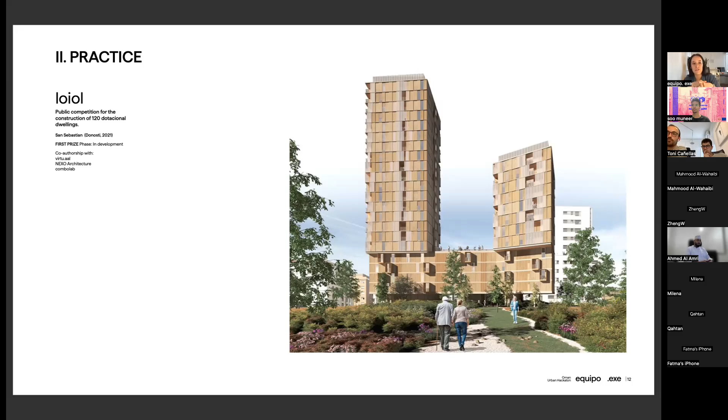This competition is for the construction of a residential tower in the north of Spain. It's 120 units of build-to-rent housing, and it's starting right now, so it's a very exciting project and we are fully involved with it. This is the competition panel, showing how we won.

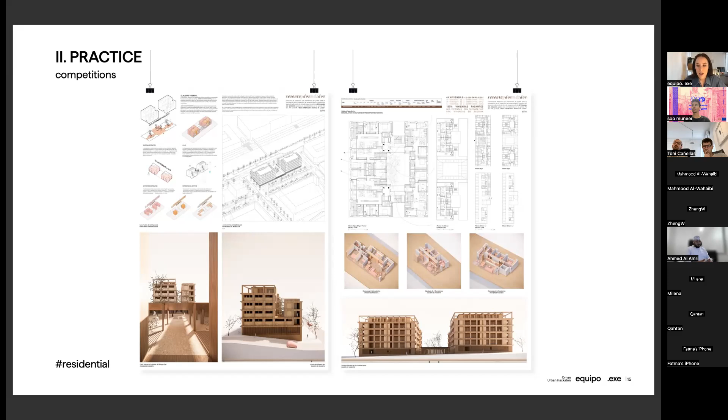We are also very active in competitions. We think this is a huge opportunity for us to rethink architecture, about global problems that affect architecture, and also to think about different typologies and how we can introduce knowledge from other areas into architecture. So we've made competitions for residential programs, sanitary programs, and some institutional competitions too.

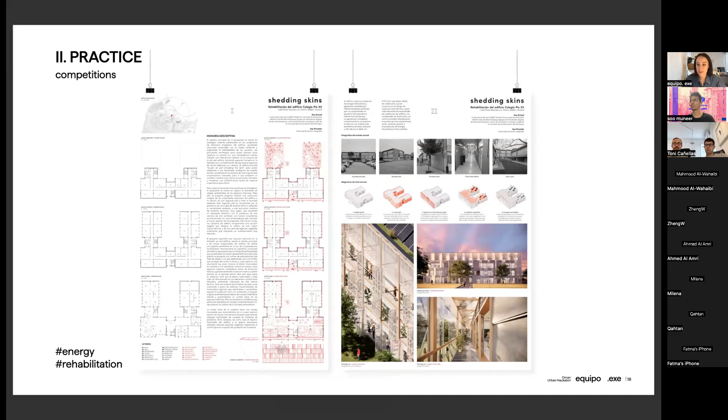And cultural buildings, but we also like to face certain aspects such as energy rehabilitation of existing buildings, and also heritage and conservation. We think it's important in these times to think about identity and integrate it within this wider context that we have with global problems.

The third pillar, which for us is one of the most special because we're aware it's not the most usual for other architectural firms, is that we do collaborations with other studios, not only architecture but also engineering studios. This has allowed us to participate in big scale projects that are otherwise very hard to reach for young firms such as ours. This has opened us new horizons in architecture.

This has introduced us to different cultures. We've learned a lot. We've been able to give fresh inputs to these larger companies, and we think this is as important as the other two. So we don't understand these three pillars in our firm as independent areas, but we think they relate to each other, and what we learn from one area we can reproduce in the other.

And also the questions that emerge in the projects we have, we use the tool of academia and research to try to find answers, or to find what other people thought were the right answers about it.

So now jumping into the specifics of the project that you might find most useful, which is the LifePact Madrid project. This is a very complex project because it's international, but it's also very local. I'm trying to do my best for you to understand the full ecosystem. If you guys have any questions, feel free to type them, or we can talk about it at the end of the presentation.

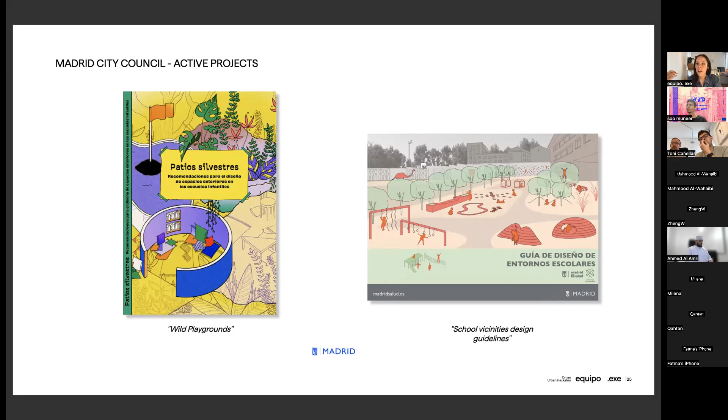So what the City Council of Madrid identified is that they already had 2 different programs that were complementary and shared some goals with the LifePack program: one about wild playgrounds, which tries to reintroduce nature within the playgrounds of the schools, and also school vicinity design guidelines. So this rewilding of the schools is not only happening inwards, but it's also happening outwards in the urban design and the urban environment of the schools.

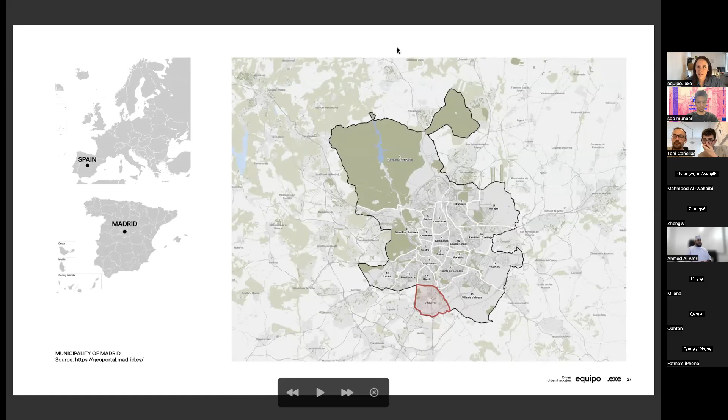Very, very strong heat waves that are already taking longer and being a lot warmer than they used to be before. We're already suffering droughts, and whenever it rains, it rains a lot at the same time, so we are already facing problems of floods. And of course, this leads to the use of active climate systems like air conditioners, which creates another new problem within the urban area: lower air quality because we use more private transportation since you cannot walk, and noise pollution. These are problems many people in many other areas of the world are facing, but these are the ones we are focusing on within this project.

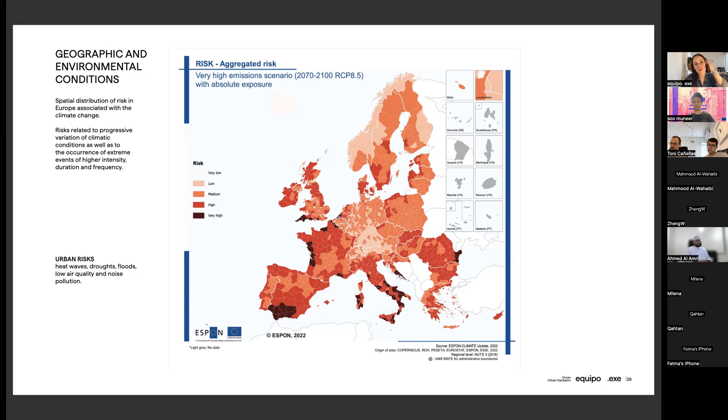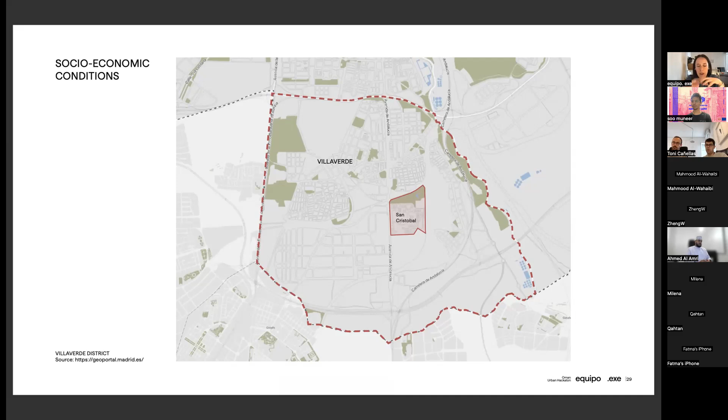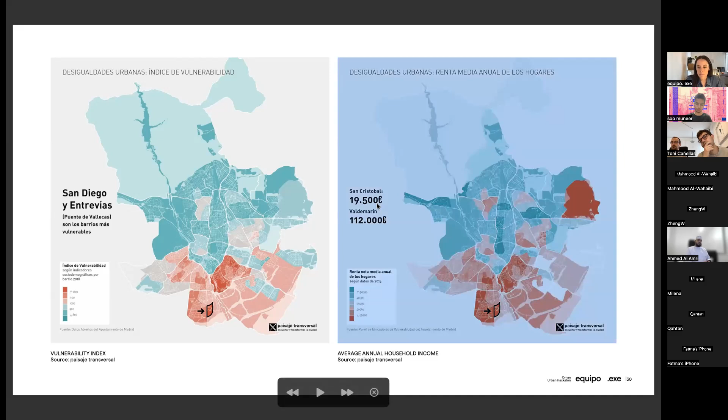What has happened historically in this neighborhood is that it's been overdiagnosed. There have been many projects taking place in this area, but they mostly focus on the early stages, so there's a lot of research and a lot of reports that have been provided, but there has not been many actions taken here.

So one of the first priorities of the Polytechnic University of Madrid, one of the first things they asked us to do, was to look at all of the reports that have taken place on this neighborhood and try to create this map, summarizing what information we already have. We don't have to go there and start from zero. We do have a lot.

But one of the most special things about the LIFE-PACT project is that it's not going to be completed until it's fully implemented. So hopefully, and I think it's going to go well, this is not going to be just another project in a folder on a desk.

So these are the parts that we have participated in as a firm, as equipo.exe. Specifically, we were in charge of the concept design of the project. We had to go through the co-design phase and the participatory process prior to introducing the feedback we got, and then redo the concept design according to this feedback. We're currently in the phase of construction documents.

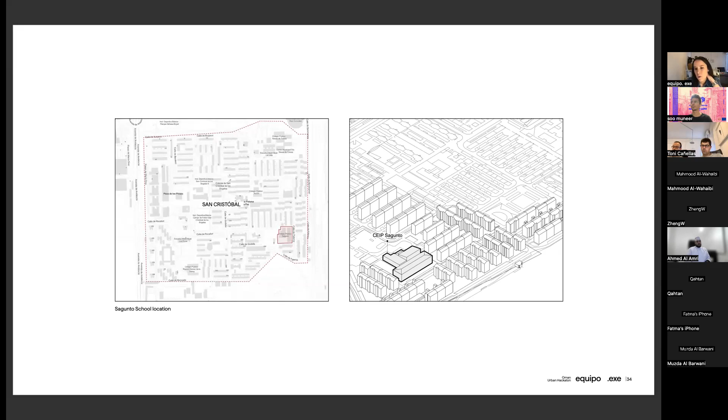Just to give you an overview of the area, this is the current state, pictures of the vicinity of the school, and this is the social housing that is there. These are linear blocks, and most if not all of them have cross ventilation, which is good. It was the way they ventilated housing back in the 50s. But as you can see, it's not a consolidated urban tissue.

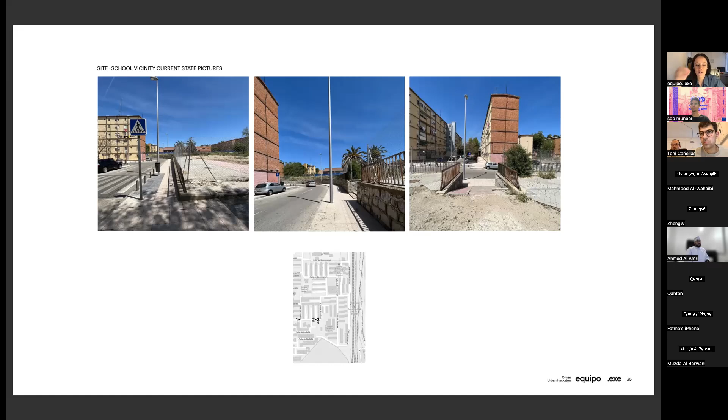There are many urban voids, many places waiting to be built. And this is the school you can see right here with the brick and the blue fence. This is the area and the surrounding area of the school.

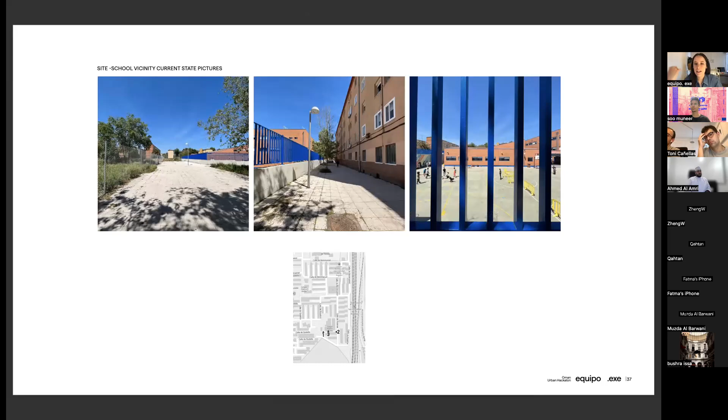This is the entrance. We can see we have a very opaque fence here. This is the main entrance, but you could never tell this is the main entrance. It's very small, and it leads you to a very narrow sidewalk. You can see there are cars parked right in front of it, and the width of the road is very wide. We also have some containers in front of it, which doesn't give a very good impression for the kids.

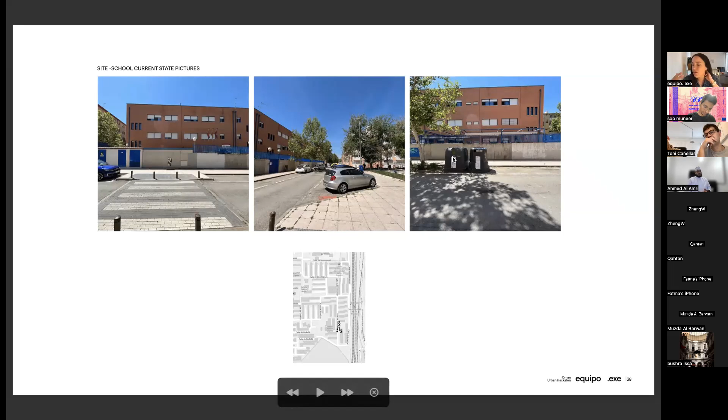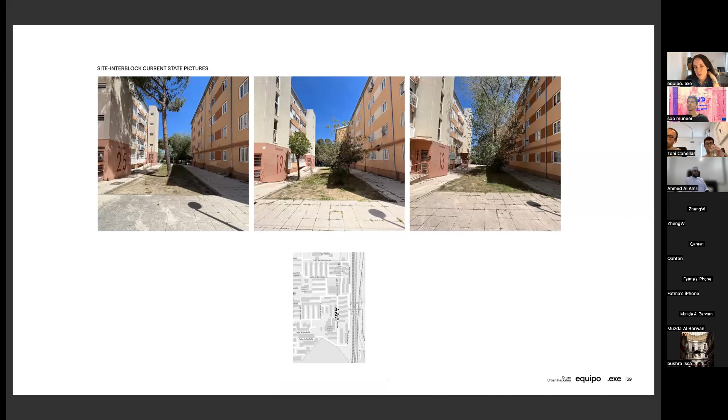This is an area specific to this project. Here we can see how another project, different from the City Council one, merges here as part of the synergy we mentioned, which is the interblock areas between these linear blocks. This used to be a green space full of nature that has been degrading over the years. Whenever they have a problem with a tree, they usually just cut it down without replacing it, so now some areas are not as green as they used to be.

So the whole neighborhood has been suffering a process of degradation from the 50s, when it was built, to today. These are the elements we had to work with: the common elements of the school vicinities project of the Madrid City Council, which were the school plaza, educational street, tree-lined gates, and service band. And we had the specific elements of the Sagunto school, which were the interblock areas.

Here's the school plaza, so we get a hint of the goals of each of these elements. The objective of the school plaza is to create a space next to the main entrance of the school. This is happening all over the city of Madrid, to promote an inclusive space for different segments of the population. This is something they really focus on.

They don't want it to create spaces only for kids. The idea is to integrate people of different ages to create a very rich social environment. In the school plaza specifically, this is done by removing very directed playgrounds and instead providing surfaces that allow free, empowering play, giving room for the imagination of the kids without creating a purely kid-led urban space.

We also have the educational streets, whose objective is to improve the conditions of the school environments, transforming them into healthy spaces and improving safety and accessibility. This usually happens by introducing green areas, removing parking area, and narrowing the width of the streets.

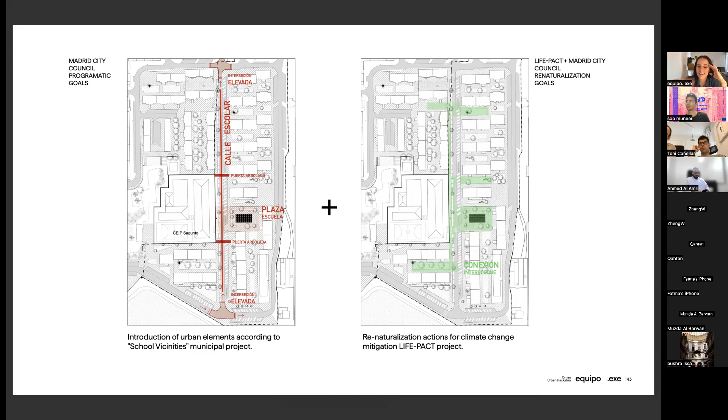So now it's very important to speak with real facts in the table with the city council and all of the other agents involved, to see what we can really do, and not only let it go in our imagination and without any real constraints.

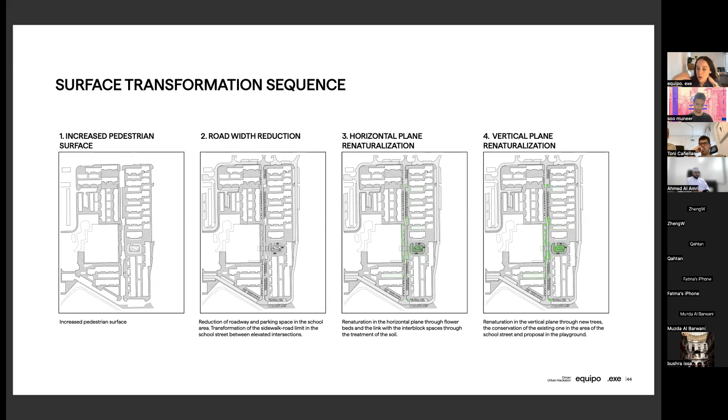So the sequence that we followed was first we increased the pedestrian surface. Then, as we mentioned, we made a reduction of the road. The third step was the introduction of nature in the horizontal plane. And the last one was the introduction of vegetation in the vertical plane, which is very important because this helps reduce the impact of solar radiation, not only within the surfaces of the public space, but also in the facades of the buildings.

So this is the area at the end of the concept design, the area that we were intervening in. This is a very fast collage that we did to provide an idea of how it would look to introduce these vertical planes with vegetation here, removing this very opaque fence. So we can give privacy to the school through the vegetation while we keep security of the public space, because from the interior of the school you could keep control of what is happening outside with the little kids. So it's a soft control strategy.

The next step that took place, which was one of the most interesting for us because we were able to receive feedback from very different agents, was the co-design and participatory process review.

So what happened was that these initial phases were taking place in parallel. Simultaneously, data collection and diagnosis of the neighborhoods was happening, a participatory process for co-design of the urban plaza, and the Sagunto school concept design that we were in charge of. So what we got at the end of this was an input collection, whose goal was to reinform the project in the transition from the concept to the execution of the project.

We have three main categories of inputs here. One of them was the inputs from the neighborhood community. Another one was from the school community, and the last one was the environmental indicators that were provided to us by Polytechnic University of Madrid, by ABIO in particular.

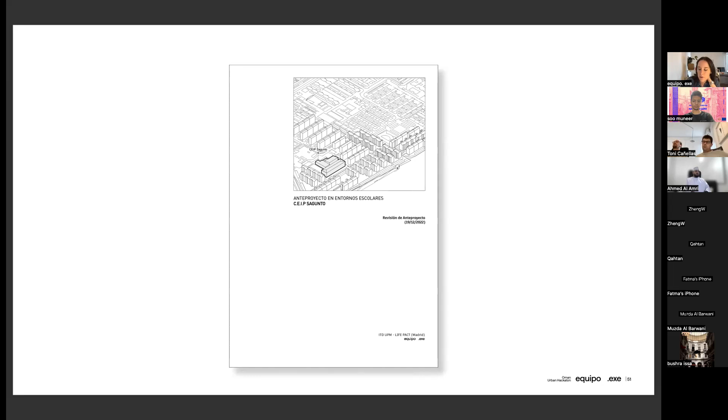And this is what we created: another report with a revision of the concept design, where we put the category of the inputs, the agents, the comments, how we could implement these comments within the urban design, and which elements of the school vicinities programs we could use to absorb these comments.

Another thing that happened at this stage was that we redefined the area of intervention, because what we had at the beginning was a very linear project with these little appendices happening with the interblock and the urban plaza. We realized that concentrating the efforts in the urban plaza and the immediate area around it would create a stronger intervention, with a gravity point in the school plaza and different gravitational points in the interblock areas.

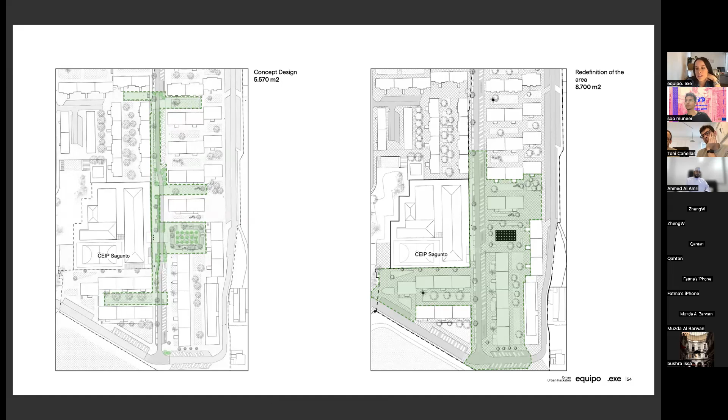So in general terms, the redefinition of the scope of the project had positive effects on the general objectives of the project. Also, the transformation of the project from a very linear character based on street design into one with a strong centrality eliminates the risk of specific actions of a merely testimonial nature, which is something we were very worried about. The Plaza Escuela project would be erected as a new center of the neighborhood, around which the rest of the interventions will orbit.

There's something very cool that happened also at this stage. This is a live project, constantly changing, constantly receiving feedback from different agents. We got this information from the Spanish Society of Ornithology, which we thought was very interesting, and we are thinking about how we can introduce it within the project. We have three species here - Vencejos, Aviones, and Golondrinas - which are specific to this area and used to live in these interblock areas when it was more of a natural interblock area. What has happened now is that they're cutting down the trees and not introducing new ones, removing not only vegetation but also the biodiversity of this area.

The temperature of these interblock areas is increasing because now they are not shaded, and the interior of the houses is increasing too because they don't receive shade from these trees. What happened before this went wrong was that the trees in the interblock area created more comfortable outdoor temperatures, so neighbors could open windows to cool their houses. Birds were in charge of eating mosquitoes and flies. It was an ecosystem that worked. The moment you remove the trees, the birds stop coming. Then you start having problems with insects, and people cannot open their windows because it's warm outside and because you have insects you don't want within your house.

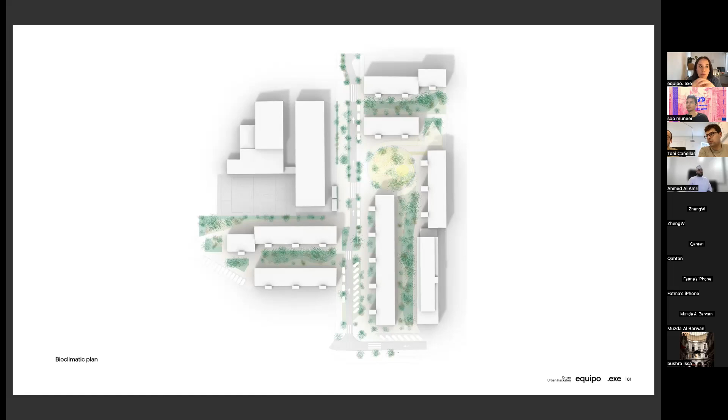This is a schematic bioclimatic plan. We try to see where we should reinforce the introduction of trees. We try to understand how the shadow thrown by the buildings itself could help us trigger certain areas of the public space.

This is an axonometric view of the school plaza. You can see how we try to avoid the specific fixed playground here. We do introduce certain things such as this light right here or some climbing areas, but it's mostly to encourage free play and imaginative play for the kids.

This also invites other segments of the population to this area, because now what you have is a higher comfort urban area that is being used. And when urban spaces are used, they're safer, because you have this informal security where people watch and take care of each other.

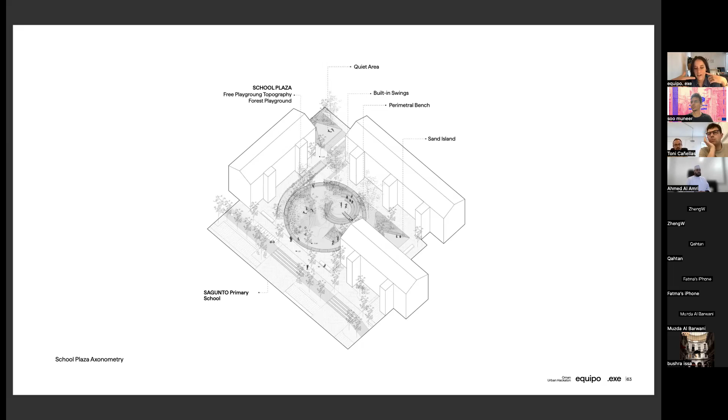This is a vegetation characterization that we've done of the area. We have this premise of a tree for a tree hole, so we want to reintroduce trees where they were designed at the beginning. We made a study on the tree species, the age, and the trunk perimeter that we have in our area.

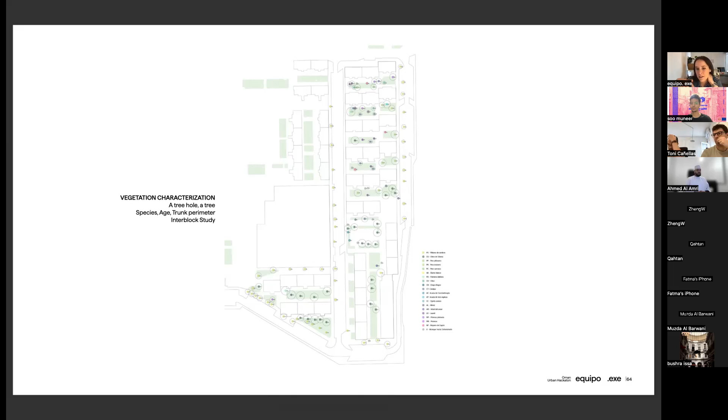We also have the 3 dimensions of public space, which is more related to program specifically, and it's important to foster comfort and identity in this space. This identity, we think it's a priority, because we tend to have places that look like any other place within the city, and neighbors like to think they belong to their neighborhood. So it doesn't have to be something very exaggerated, but it's something we have to take into account in the project, and we certainly try to always introduce it. And of course, use activity, as we were mentioning, as the basis for a safe space.

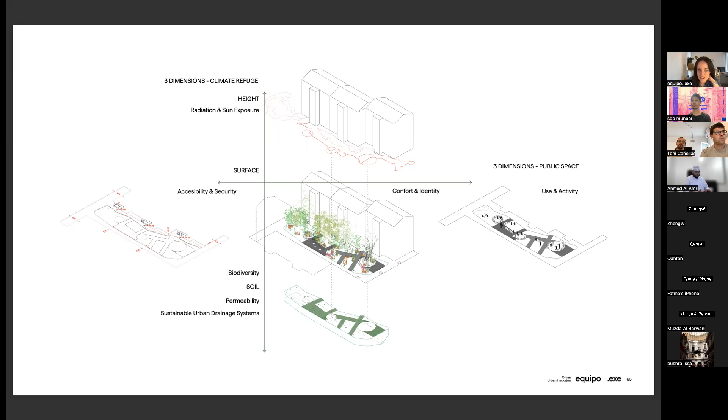This would be an axonometric of the interblock area. And this is a collage that we created to provide an idea of all the aspects we have in mind. By working with these more abstract images, it's just like when you do a hand drawing—you don't have the constraints of specifics, but it gives you the opportunity to create a strong image that can serve as a focus point. So we know it's not going to look exactly like that, but we will try to make it look as much like that as we can.

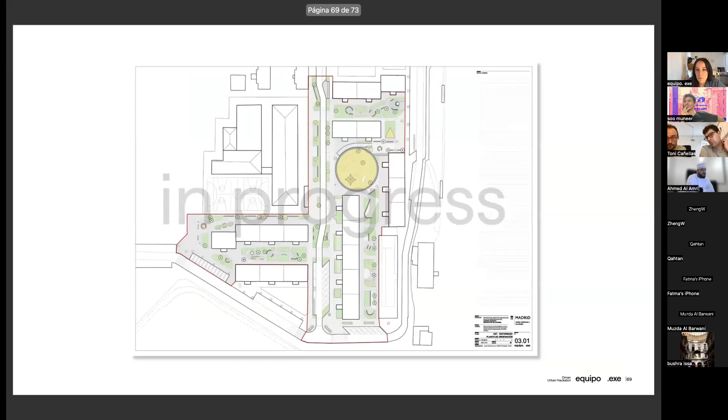The phase we are doing right now—the 3 prior phases are already completed, and we are in the construction documents. I would love if we could have shared the documents with you, but they are in process, so we don't have much to show. What we can show you right now is just a plot of how it is right now, the 3D we're working on, and the specifics of the Urban Plaza.

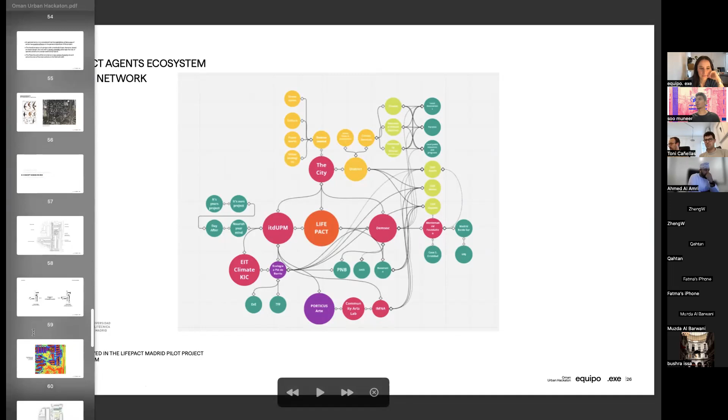Actually, I have a question. Silvia, you mentioned a lot about heat radiation, and as you guys know, here in the Middle East, heat waves are a big issue, and one of the ways we can regulate and balance out heat radiation is by vegetation. Could you speak more about how we can utilize the idea of vegetation with radiation maps, and how we implement those in a certain space?

Yes, sure. This is actually one that could be called a nature-based solution. What we did here, because it helped us a lot, was to divide the horizontal surface and how to intervene in them, and the vertical surface and how to protect them, because the strategies you need to follow are a little bit different. Of course, you have the tree, which we all know is a single element that provides shade, but there are also other strategies.

For example, here in Spain, in Madrid, we have the problem of heat islands, which is something that happens within urban environments when you have pavements that are dark. They absorb a lot of heat.

Usually materials radiate heat at nighttime, which is when temperatures should be lower and the heat should be removed by the breeze. The fact that we have these materials with high thermal inertia means they get the warmth, store it, and release it at night. What happens is that we don't have the nights anymore to refresh the environment.

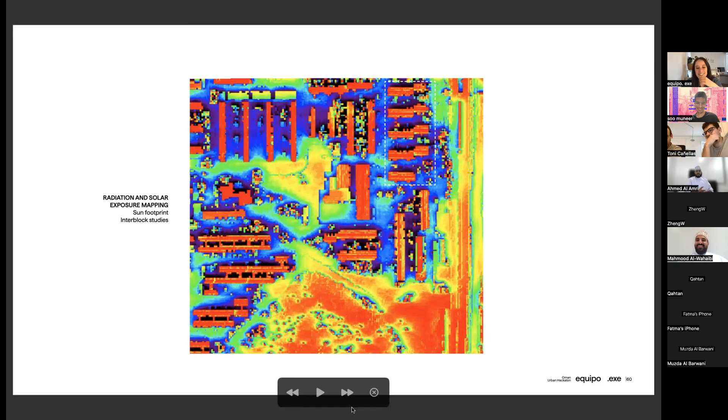Dr. Bindu or whoever that is from that team. Hi, good evening, this is Bindu. Can you hear me? Yep, and we also have Ahmed Al Amri, he is also from that team. Yes, Dr. Bindu, here I have one question.

That is, you were talking about permeability in the pavement or in the road? In the pavement. So this can be done, are you using material or creating permeability in the concrete? Because when we are going for lightweight permeable concrete, won't it be more useful?

Well, there are certain materials that allow concrete to be permeable. They're very interesting. We're actually now in the construction documents phase, so we do have to go to the specifics of materials. For us, it's also a good opportunity to learn from you guys what you're researching.

And we do know there are certain pavements that allow the water to drain on it. I'm not sure if this is what you were mentioning, Bindu. Yeah, this is what I'm mentioning, because during rain times we can see some water stagnating and it's very difficult to permeate inside. So it will be good if you are creating a permeable pavement. For a road it won't be that suitable, but for pavement, so that this water will percolate inside, and that can also be used for creating this cool atmosphere. This water that is collected underneath can be drained through underneath that way.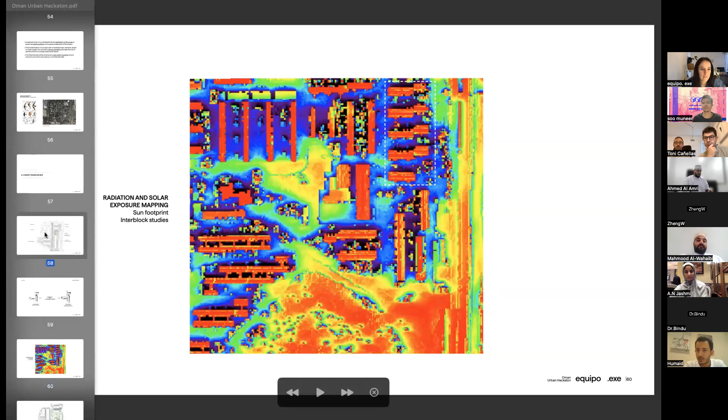Thank you, Mahmood, for this great opportunity and presentation. Regarding the mobility, as I saw, you increased the pedestrian walkways and areas almost double. So I have a question regarding accessibility, as we know it's an important thing in urban planning. While you are increasing the pedestrian areas, how did you take accessibility into consideration regarding parking for private cars and for public transportation? I saw one map you showed about accessibility, if we can go again to that map and explain more about the accessibility point. Does it change before and after the pedestrian walkways changed? I'm not sure if the question is clear or not.

Hey, I think it's clear. Is that what happened with these cars your question? Yeah.

Well, this is a tricky topic. When we met with the city council, they told us they're usually very careful before removing parking spots, especially in this neighborhood where people don't have private parking and all park on the street. They are committed to reducing parking space in the main facade of the school, but asked us to try to respect the number of parking spaces in other areas of the neighborhood, which, if we look at the floor plan, isn't that many areas.

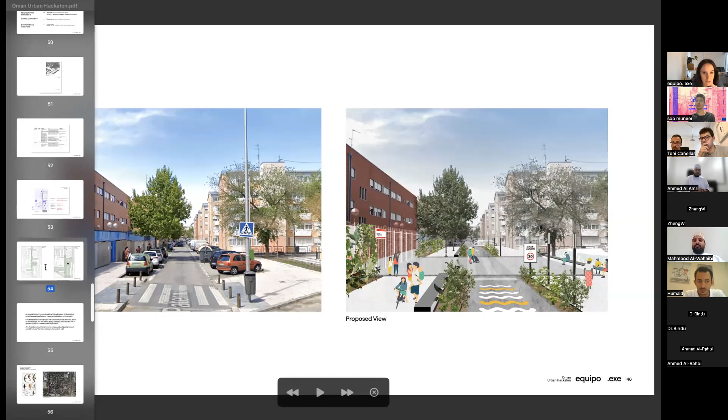As you can see, this is clearer. One thing we do is that even though the actual width of the street hasn't changed in this part, we can work with materials and the introduction of nature to reduce the perception of the width of the street. So even though we still have about 6 meters, the perception as a pedestrian is that the street is only the width of the road, because the parking spots belong to the sidewalk language.

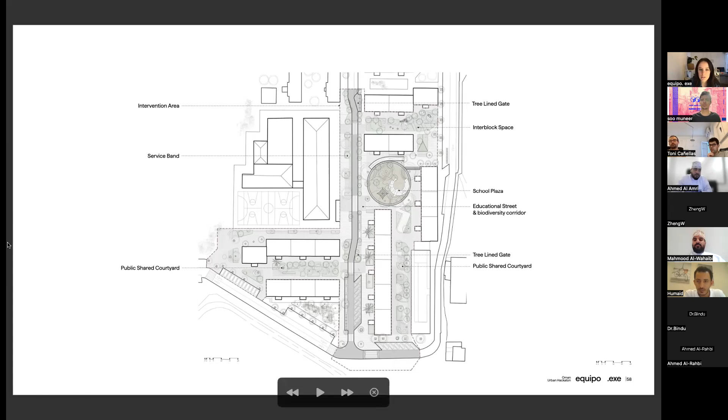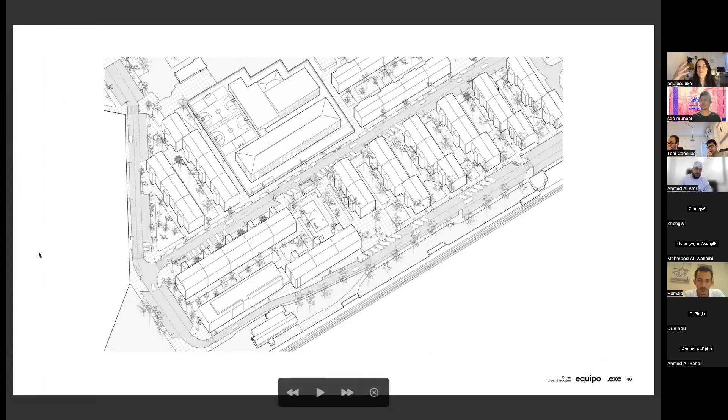I'm not sure if I'm being clear. So contrary to what we had before, where all of this road was made of the same material and you only have the sidewalk, when you reduce it to here, the perception of people is that it's safer, for example, to informally cross the street, and the perception of cars is that it's narrower, so they slow down.

And regarding the materials we use in the parking bays, as we can call them, we can introduce new materials different from the road, like these permeable pavements. This allows us to reconfigure the hierarchy of the street mainly through the language and not as much through the section of the street.

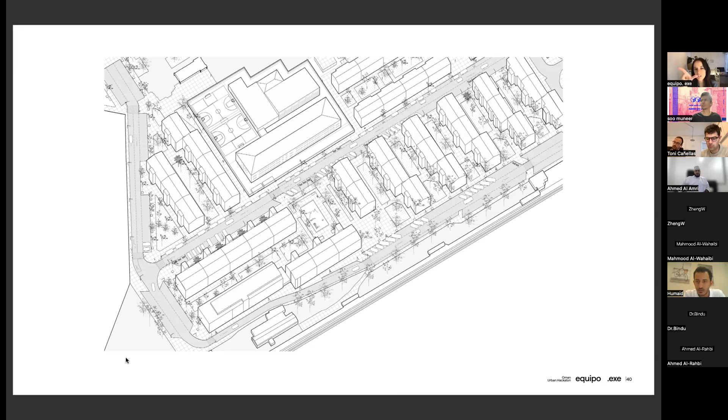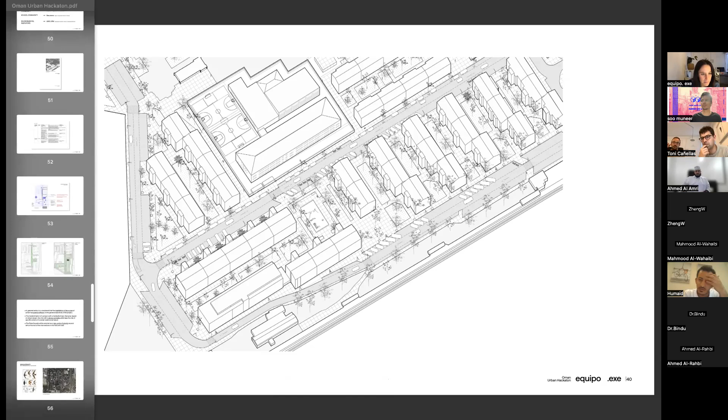Maybe we can see it in the section here. Let me show you. Is this answering your question or not? I'm not sure, I hope so. Yes, somehow. Just regarding public transportation, how far is it, or what's the closest?

Okay, so here we have the train system that connects with the whole community of Madrid, the whole region, in this street right here. And in this street we do have the underground entrance. Otherwise, there's only the bus lines, which take this road and go all over the neighborhood before returning to the main streets.

Regarding public transportation, it's not a very complex problem to face here, because they don't have such strong infrastructure, and what they have is mostly on the perimeter, so it doesn't truly affect the specifics of our school's vicinity. But I understand your concern, and it certainly has to be taken care of, especially since it's something we encourage. But it's not a very dense neighborhood, and as we know, public transportation works better the denser the neighborhood is.

Yeah, clear. As I can see, you took it into consideration, and for accessibility we still have highly accessible points. Well done, great job. I have another question regarding socializing. I'm wondering if you took the land uses into consideration, the type of land uses around the study area, or is that not important to consider?

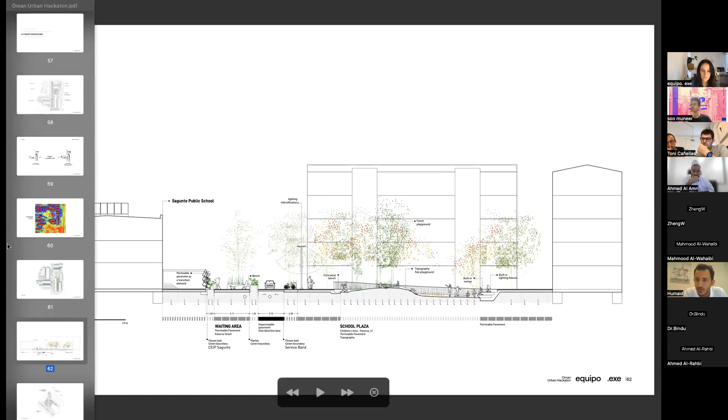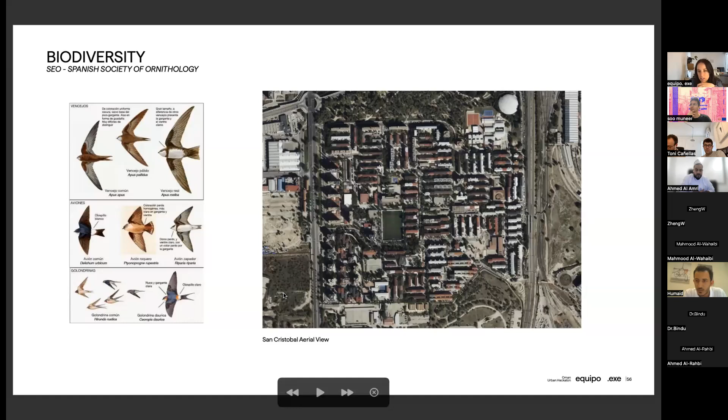Well, of course, always. Like the type of people living in that context, I think it's primordial to take that into consideration. Here, how we worked is that these agents—I'm sorry, I'm going back and forward to try to make it more clear.

So these agents were working on the social action. They were not only talking to the neighbors, but also to the neighbor associations that already exist within the neighborhood, some of which are very active and strong within the community and hold certain power among the neighbors. Talking to them, learning their opinion on what's going on, providing them with the initial design of the project, and hearing their feedback was very valuable information we gathered. And of course, we tried to introduce...

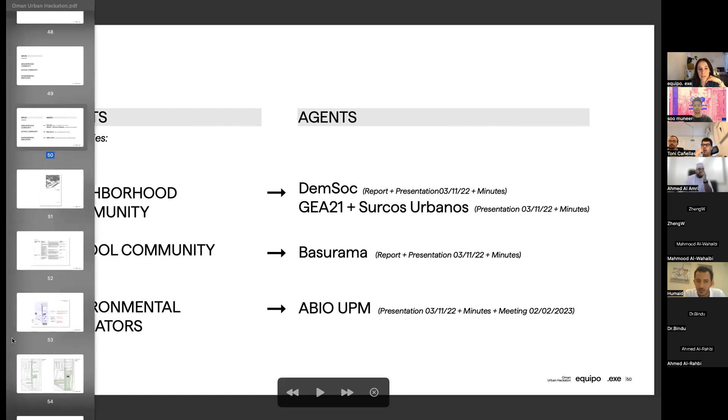I think you always have to listen to the people who live there. What I find is the hardest part is to know when to let them speak, in the sense that sometimes in these collaborative processes people end up designing the public space, but what one neighbor wants is completely different to what other neighbors want. One wants a garden and the other wants a hard plaza, and then they fight. So it's important to include in the team people who have expertise in leading this participative process, because they know how to manage these workshops, and also how to manage the information.

I think it's important that we as urban designers think about the problems they give us, provide an answer, and listen to their feedback. So it's not that they work on a tabula rasa, a blank page, but they work on a proposal that already attends to some of the goals given to us. By doing this, you're helping them understand what you're trying to achieve, and they're helping us understand what things have been tried before and have not worked, or what should be taken into consideration that isn't currently being addressed.

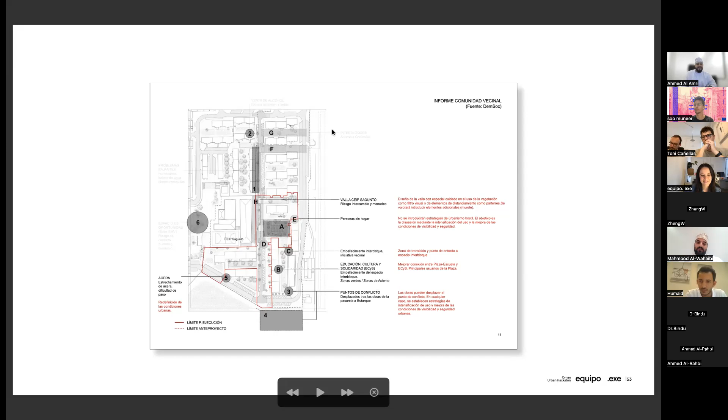Very cool, very cool. So Ahmed Al-Amri, you've been raising your hand. Yes.

Just to follow up on what you said regarding including the community, I think it's one of the most challenging points, because sometimes you only inform, but sometimes you actually take their expert opinions into account. My question is a little closer to our requirements. I wanted to ask about the implementability of your proposal. Is this already a clear assignment from the city council that they will fund, or are there investors coming in or something? I want to know how it will be implemented.

Yes, it is already assigned. There's already a budget reserved for this project. Actually, the reason we got feedback about the birds at some point in the middle of the process was that it connected with another program about the reintroduction of biodiversity in the city of Madrid. By joining these two programs, they got a bigger budget from the upper government. So yes, it's going to happen. It already has the budget reserved, and if everything works as it should, in a couple of years it should already be built.